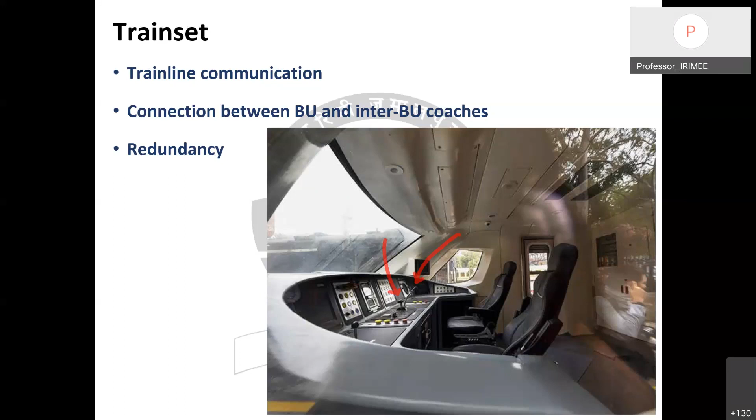I will try not to draw anything on the screen. Okay, at least I got that back. All right.

So there is one more thing, let me draw that. I think there is one more TFT, and it is only in front of the loco-pilot, not in front of co-pilot or assistant loco-pilot. You can also see one more handle, that is the auto brake, which is the last resort pneumatic brake, not supposed to be operated at all. Is it identifiable to you all?

Yes, sir. Yes, sir. Okay.

So there are a few things. We have seen a master controller which is at the center of the desk, a TFT touch screen which is in front of the loco-pilot, and there is one limp mode pneumatic brake at the end, which is basically in an isolated condition most of the time, all the time in fact. So we will forego the rest of the buttons, we will not get into that because those are hard buttons for operation of the train set. But the handles and the TFT screen are very important, and we will be discussing that further.

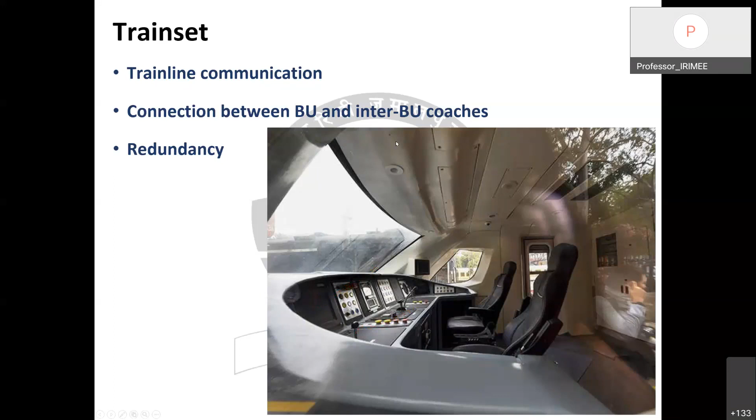Now there is another point. The coupling is very difficult - it's not easy to decouple a coach and change it. Has it been covered that if a train set becomes defective, not able to run, you need another train set as a replacement?

So most of you, is anybody from the loco side or are all from the C&W side? I need some feedback, few can reply.

Sir, I am from the loco side. Avinash Das, SSC GRC, Southeastern Railway. Garden Reach. Acha, Garden Reach. Yes sir, I thought GOC SR. Okay, but you are from the loco side - HHP loco or conventional electric loco? Sir, HHP loco. Then some of the things here will be much more familiar to you.

Exactly sir, but some of the things are a little new for people who are purely from the C&W side. But the people from the C&W side, you all know the concept of spare coaches.

Yes? Yes, I need some feedback at least. Yes sir. So what is the, okay.

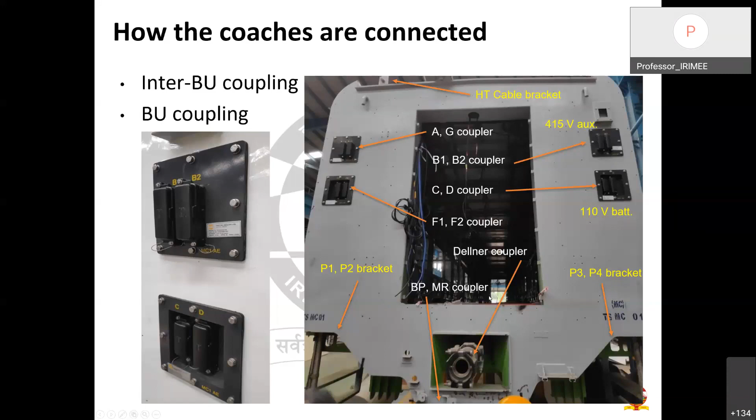How many traction motors are there in total? Anybody? Because propulsion circuit is already over. 32, sir. 32.

32 traction motors, right? And you would think some of the bogies are isolated. Now these are in pairs. One traction motor cannot be addressed separately, they are operated in pairs. So you can say there are 16 motor units, each unit has got two traction motors.

So that you can disconnect the whole bogie and isolate it if some of the motors fail or there is a problem. Any kind of problem, you can isolate the whole bogie, bogies after bogies. There are 16 bogies which are powered, right? In quite a good number of them you can isolate and your train will still run. Acceleration and deceleration may be slightly less if about a quarter of the bogies are disconnected, but still the train will run and reach its full speed potential. And there are other things like the compressor.

Bogies, or only 3 coaches? 16 bogies or 16 coaches? 16 bogies are powered. 16 coaches, 8 motor cars, 16 bogies are powered, right? Each bogie has got two motors, but these motors are not controlled separately.

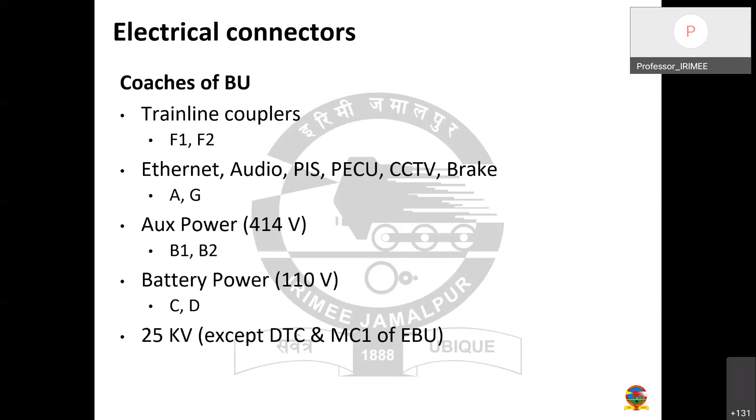Battery power, it is both are there because battery normal, battery direct, for that we have twin brackets, and of course 25 kV. So you can see with slight variation, the type of coupler is quite similar. Here the TC to motor car, only difference is you can see here it's a power cables P1, P2, P3, P4, right? Rest other all things are same.

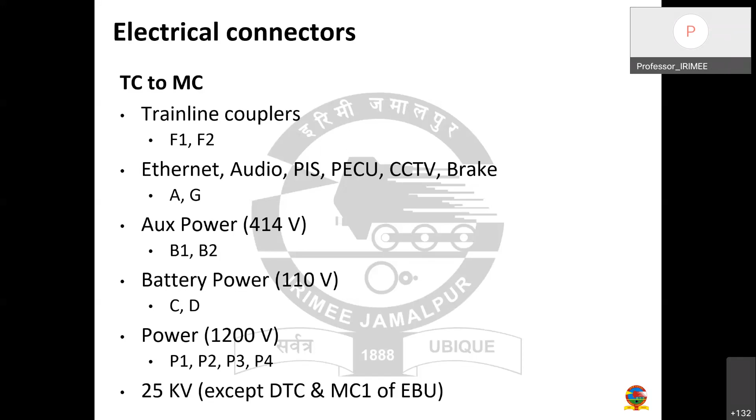It is trailing car to motor because trailing car has got a line transformer, and then of course that step down voltage has to be carried to motor car, motorized coaches. And then we have pneumatic connections also separately, that is brake pipe 5 kg and MR pipe 10.5 kg, that has the nominal pressure. MR can work for all the way from 8.5 to 10.5 kg.

10.5 is upper one, and then brake pipe of 5 kg. Why do we maintain brake pipe when we have EP brake, electro-pneumatic brake - why do we maintain brake pipe, train line brake pipe? Anybody? In case of during low speed, is required... control pneumatic braking. If train goes below 30 kmph it requires. No.

If you are using that, the train speed will be limited. Your normal control is only through EP brake, electro-pneumatic brake, through electronic signal application and release. If one channel fails, there is another channel, again electronic brake. If all the channels fail, then you can physically control by modulating the brake pipe pressure. That is happening right now. You reduce this pressure and brakes will be applied.

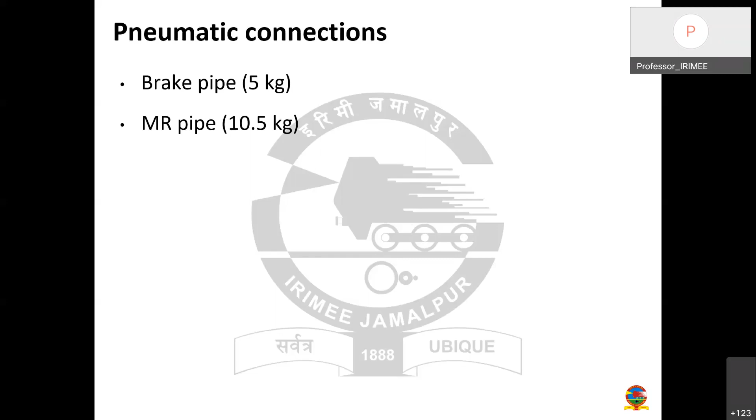So what are the things that come in TCMS? Train Control and Management System, right? This controls motoring, braking, direction, reverse, front, and so on, right? It runs in either side. Both sides are front actually, right? Only it is A direction, B direction, right? The control of door, right?

These coaches are fitted with sliding type automatic doors, which need to be closed completely for the train to even start.

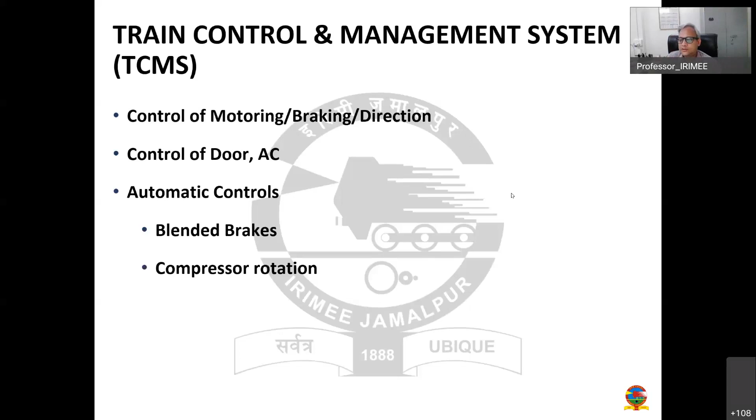The control desk, right? So these are just a few items on the LP side and ALP side. There are a lot of them, and for most of the part, like in case of door opening, what is the minimum condition required for a door to be opened? Anybody? What is the first requirement for the door to be opened? The brake should be fully applied. Actual speed should be 0. Speed should be 0, yes. Speed should be 0, right? The train should not be running.

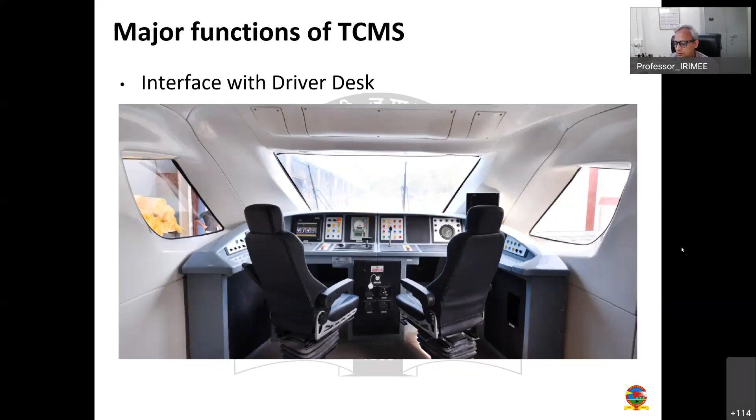Okay. I have to disconnect the annotation. Go to next slide. Okay, let me see that.

Right. Panto and VCB setting: of course, lowering we can do, raising we cannot. There is a separate button for that. In the panto setting, there is one pantograph in each basic unit, so there are 4 pantographs. Only 2 of them can be controlled together. Yes, no, anybody? Yes, sir, only two can. So what is the combination? Which panto can be operated? 1 and 4, 2 and 4, 2 and 3. Yeah, exactly. So this setting is available here.

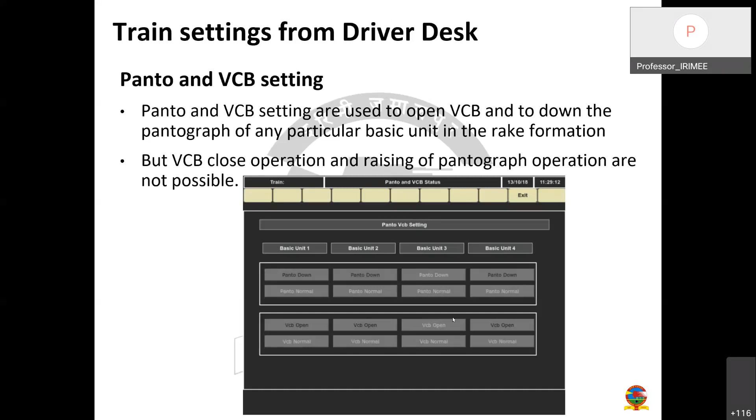Go to next. Bogie cutout. People from the loco side may know the motor cutout procedure. In Alco locomotives, there used to be one handle, the MC cutout handle we used to call it. In later generation software control, you could control it from your display. The same thing is available here. You can isolate any bogie from your DDU, the driver display unit. It is a touch screen.

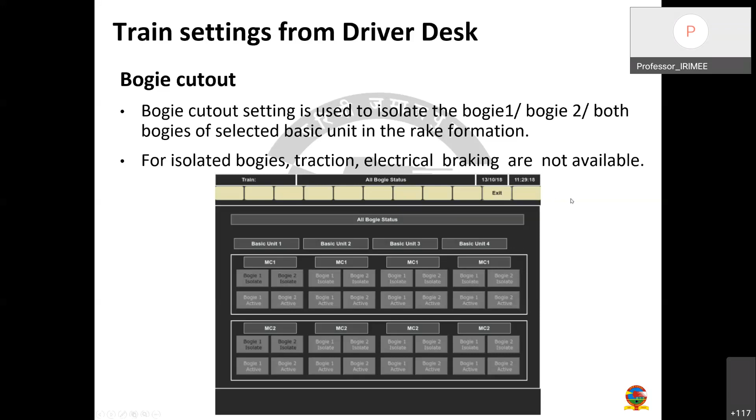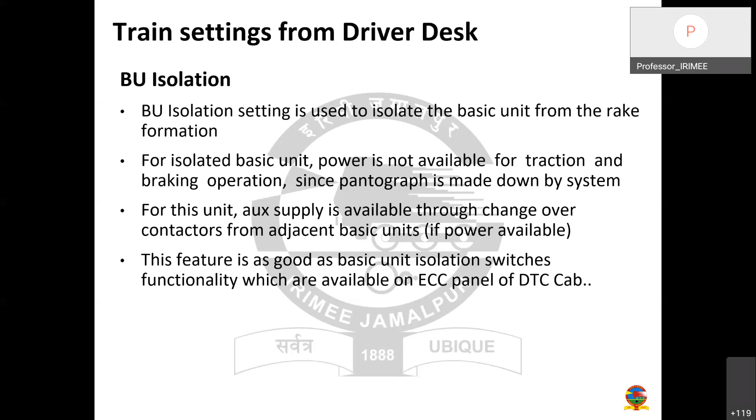Now basic unit isolation. Not only that, you can isolate the whole basic unit, right? If you isolate it, power is not available for traction, but power will be available for auxiliary in that basic unit, because due to some technical problem you might have isolated the basic unit, but there may be passengers. So all passenger comfort things will still be on, but everything related to motoring and traction would be isolated. So we have a system of BU isolation.

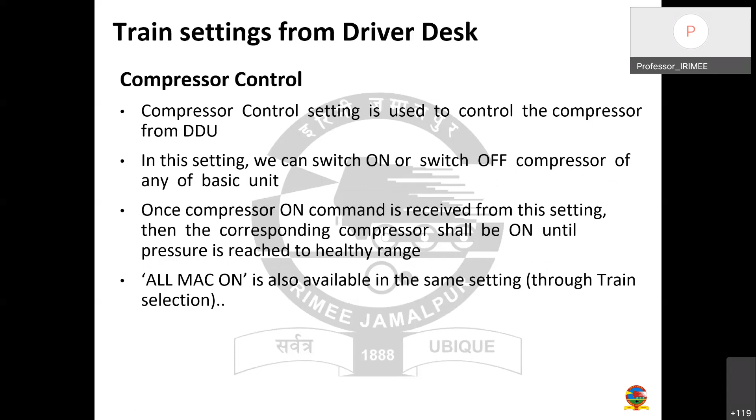Then it also maintains the compressor control. There are 4 compressors and you can control them individually. You can turn all on, switch off any specific one, or put it on auto, then the computer decides which compressor has run most so that it can be switched off. EP brake isolation can be done here. Bogie cutout cocks and physical isolation valves are available, but you can simply cut out from the display unit also, because every application and release is by the computer. So you can cut out the whole thing.

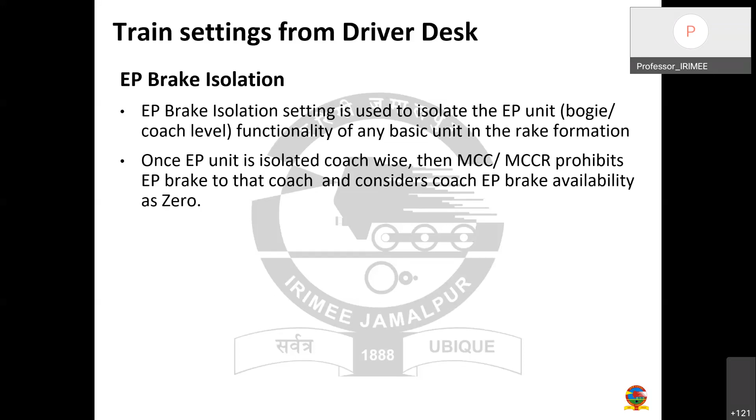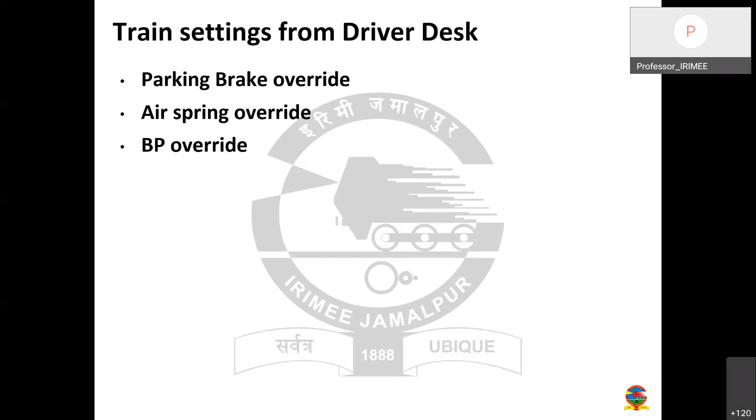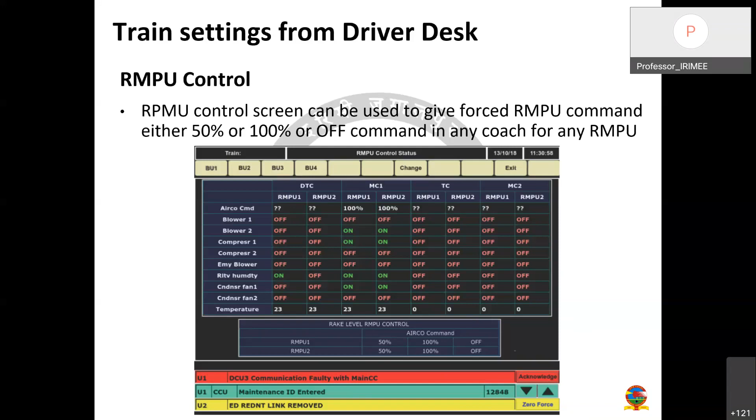Then there is AC control. I just told you that all the AC can be controlled right from the driver's desk. So load balancing, switching on and off, everything can be done from the driver's desk. Is it visible to you all? Because I am going through the last 3-4 slides. Visible, sir. Yeah, these are very basic functions of TCMS, because it's the backbone of the control system of the train.

So if there is a permanent problem with these doors, it can be overridden, and the system can bypass that and still start the train. Or on the other side, individual doors can be opened. Right now, the system opens all the doors on one side, either left side or right side. Why one side? Because the platform will be only at one side, isn't it? Platform will be either left side or right side.

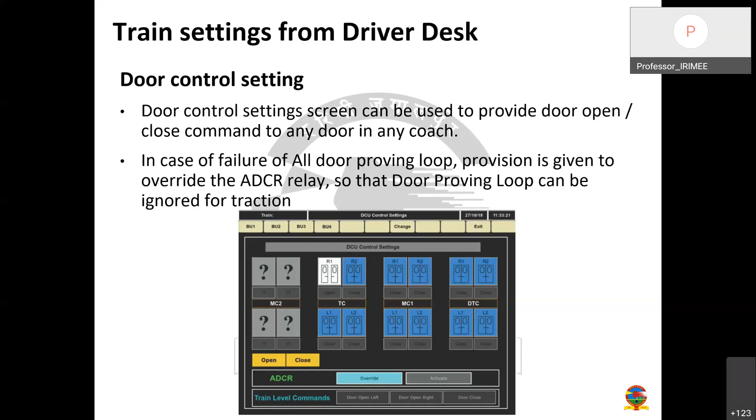So one side doors can be opened, and the system works by default by opening all the doors at one side, either side. So that default behavior can be overridden. One specific door can be opened or closed. That is also possible through the driver's control desk, right?

Then we have pantograph control, VCB control. There is a VCB before the pantograph and there is a VCB after the pantograph. I think it should have been covered in your propulsion circuit or power circuit, so I'll not go into that. There are dual VCBs on either side of the pantograph. That also can be controlled here.

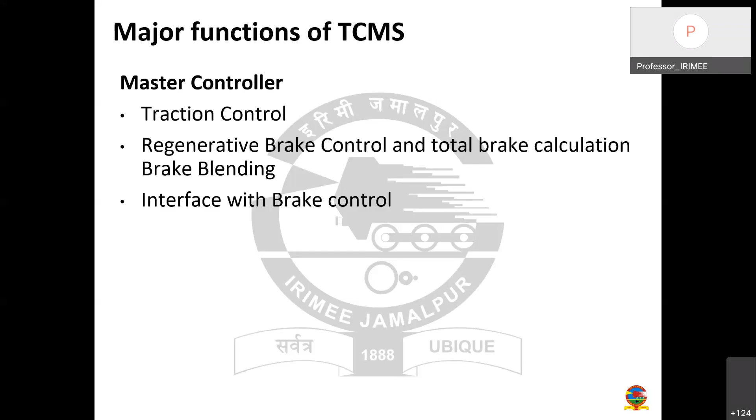Then the most important controller is the master controller. It does the traction control, regenerative braking, total brake calculation, blending of brake, right? And interfacing with the brake control. So there is electronic circuitry. It simply interfaces with that. Okay.

So it is interfacing with, I told you already, it can control the whole RMPU, but RMPU gives the feedback back to the TCMS. There are a few things. Say, for example, if a coach catches fire. So in case there is any fire in a coach, then how will the AC work? The blower will be reversed and the AC unit will be shut down.

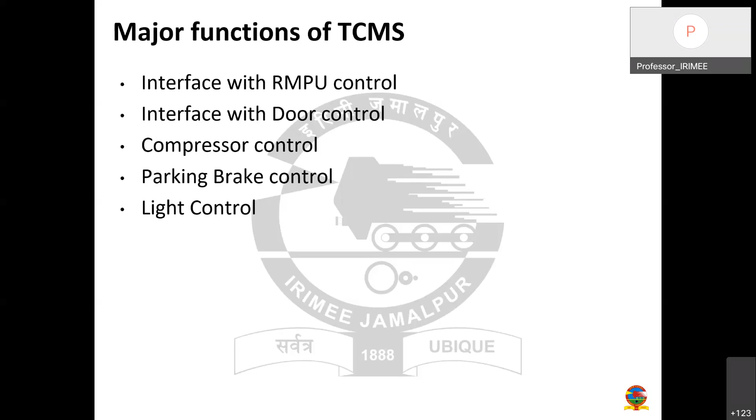But how does it give feedback to the TCMS? Through the same interface. So there is a lot more. It is not only control. There is a feedback part also, right? Okay. Now, what are the other things? Safety system.

So rollback is not permitted here. If rollback is detected, right? If the train is standing and it is, as per the key position, as per the occupied driving DTC position... There is an occupied DTC and there is an unoccupied DTC. Which one is the occupied DTC? Anybody? There are two DTCs.

Leading cab. Leading side is occupied. Leading cab, yeah. On the other side there will be the guard. Even that will be an occupied cab, but it will be occupied by the guard. So when you say the occupied DTC, that means there are the loco pilot and co-pilot, and the train is moving in that direction. The key is set in such a way for the train to move in that direction. It is the occupied cab.

So if the train starts rolling in the other direction, whatever the reason, something is pushing, or there is a gradient, anything. If the train rolls in the opposite direction to the key position, then the system automatically detects that and applies the brake. So even if you leave your train unattended, which of course loco pilots don't do, and a rollback condition happens, the system will stop that.

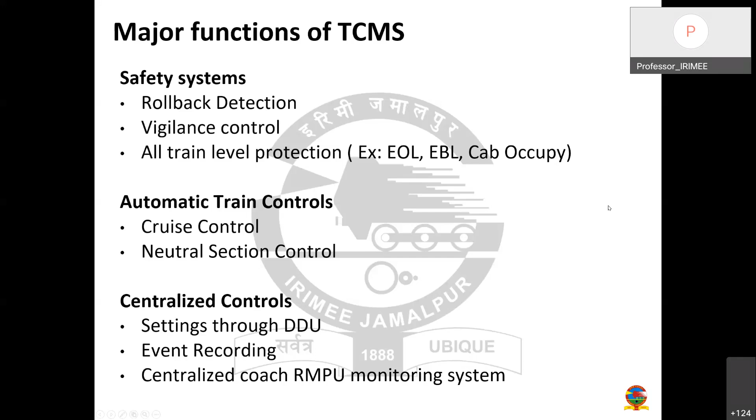Then apart from that, there is event recording, of course, data like we have in locomotive. All the technical parameters are recorded and kept for downloading. There is remote train monitoring also. So all the data is transmitted to a centralized server. So even though the train is running, a large amount of data is made available to the maintenance people. They can see how well the train is running. So it is very good in that way, very informative.

Now coming to the train line communication, right? Now this is end basic unit. How can you identify it is end basic unit and not a middle basic unit? Anybody? DTC is there. DTC is DTC. Otherwise, it will be NDTC, right? Now the components here, we can now look at the bottom. So there are a few things. Now the size of the block does not represent the size of the component. It is a block diagram. I'm repeating that. So the size of the box doesn't mean that it is a big component.

So ECN switch, that is Ethernet consist network switch. It is a simple Ethernet switch basically. These are industrial switches. Anybody who is working on the computer side would know what an Ethernet switch is. Ethernet switch, anybody? With Cat5 cable or Cat6 cable coming to your computer with RJ45 connector. Remember that?

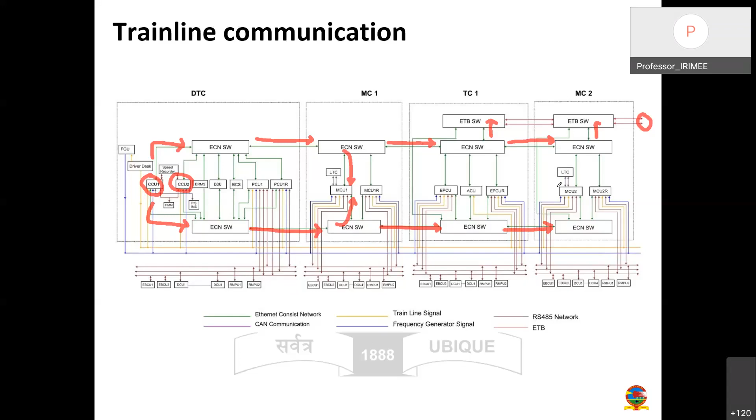No, it may not be that clear right now, but let us talk about coach to coach. It is just how the coaches are connected to each other I am trying to explain. Right? Now let's see the DTC. Now, the important thing here is driver's desk. Is this visible to everybody? Yes, sir. Yes, sir.

Now, as I already told you, the size of the block doesn't mean the component is that big. So these Ethernet switches are very, very small components. Of course, they are very, very rugged. It's not like your normal Ethernet switches. It is similar to military standard. So circular socket type connectors are available, not RJ45. So these Ethernet switches, they are two and wired separately and in parallel, right? We already discussed that. But what are the other things?

If all of this fails, the digital network, then the system goes into RDM, rescue drive mode, right? That is based on frequency. So rather than digital network, now your system will rely on a frequency generator. So based on frequency, by modulating the frequency, you can control everything. Now the driver doesn't have to bother.

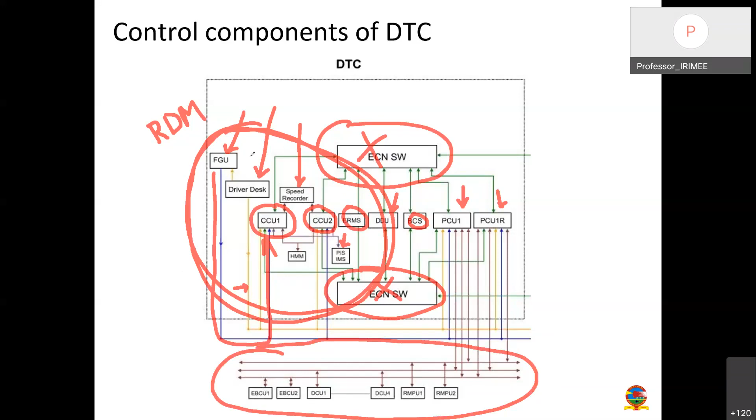Okay sir, so these things are special in the DTC - it will be in both DTCs. These things are common everywhere. At the bottom there is a network of 3 parallel cables - can you see? These are all dark maroon colored, not purple. Let me annotate again - there is one here, one here, and one here, right? There are 3 parallel cables.

You see, your brake control is connected to one. Your door control, DCU1 to DCU4, is written - is it visible? Can you read that? Yes sir. So DCU1, DCU2, DCU3, DCU4 - there have to be 4 actually, they simply write 1 and 4, so 2 and 3 are in between. So door control is at the middle, and then you have RMPU control 1 and 2 - you have two RMPUs, door control one for each door, RMPU control one for each.

But your brake system again has redundancy - EBCU1 and EBCU2, that is electronic brake control unit 1 and 2, they are parallel. So even the brake control units are double. One fails, the second will keep working. Your driver will not even know the difference, but maintenance people will know.

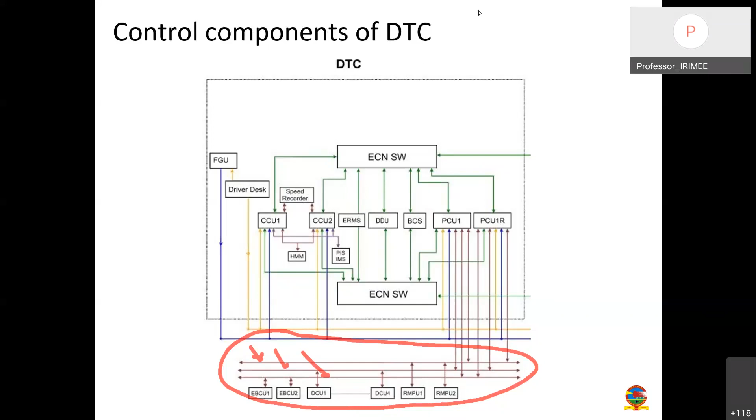Exactly the same thing, the rest of the thing will change. So major component, we discussed that already so I will not go much into that. Driver's desk - we have shown what are the major components in that. I'm not going into each button, that is also available, if I start listing it will take too long so we will just leave it at that.

So major control on driver's desk is basically speed, driver display unit which acts like a centralized control, and the master controller. So digital signal goes through the 2 ECN switches - this is through A and G coupler. Whatever we were looking at, ECN switch, that is through A and G couplers. We discussed the coupler, if you remember - remember that A and G coupler?

Initially, how many couplers are there? I just showed that it is available - we will share this whole material. Yes sir, 8 couplers. All right, and then train line signal through F1 and F2 coupler, and the frequency signal - again the frequency signal is along with the train line, couplers are the same, okay.

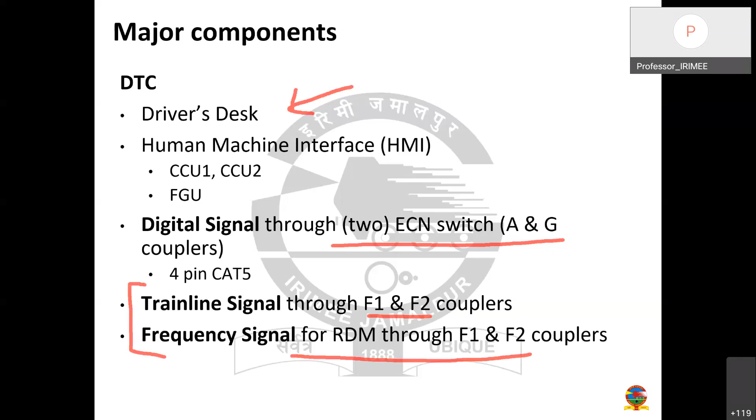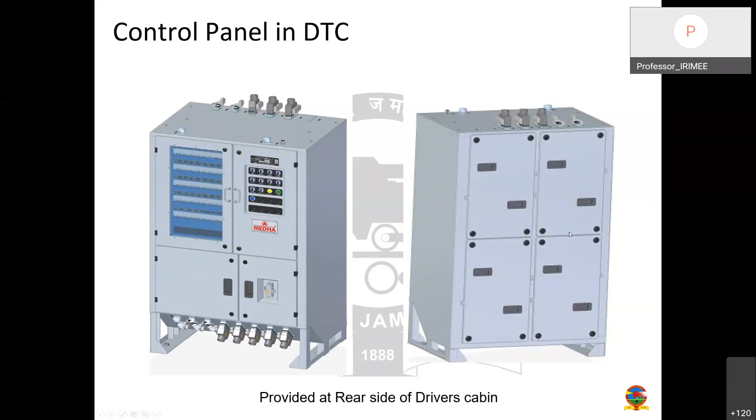So this is how the control is connected - this is the control panel in DTC. It is behind the driver, where the driver sits, the driver's chair - you have seen that rear side, we have not shown it. It is mounted onto the wall itself, flushed with the wall. So it is behind the loco pilots, the front and rear. So this is the inside view.

So these are basically - what happened? Sorry, yeah. So these are additional items for the Loco Pilot - these are basically the centralized control units, the computers, networking switches, headlight controller, train protection, and so on. This is the rear of that, so this is a cabinet for connecting all the cables. All cables are connected from outside through the circular socket type connector, so it is very easy to disconnect and reconnect again - the whole thing is a very, very modular design.

Okay, now we go back to all other coaches. So what are the common things available in all the coaches? I already told you, brake control unit is redundant - 2 of them are there, it is through the network, so this brake network is available. Then door control unit, and then RMPU, that is the AC control unit - these are 3 individual networks, available in all the coaches. It uses RS 485 / 485A standard.

So these are connected through ECN switch. Right, okay. So it is common.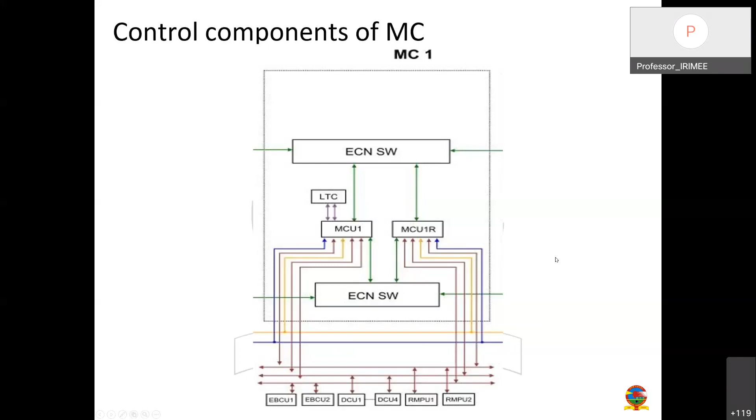The other things are all the same. Only thing is LTC. Okay, this is how it looks like.

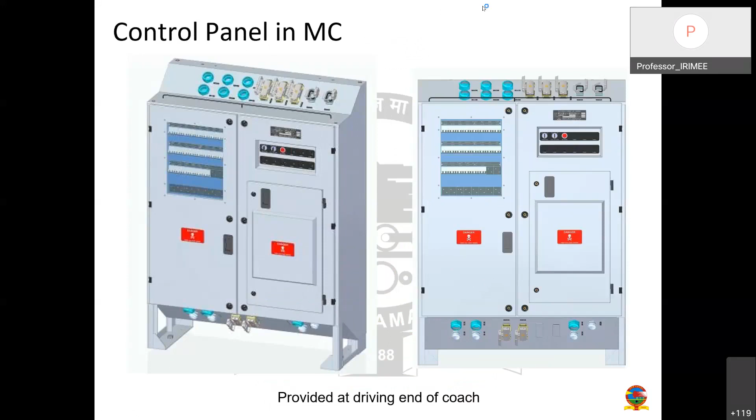Control panel in motoring coach or motor car. Again, something else is different here, that is the driving end of coach. What is the driving end of the coach? Anybody?

Driving end of the coach, which side DTC or NDTC is in a basic unit. So these coaches are directional, right? Their coupling is directional, their orientation is directional. So this is provided at that end for any basic unit—one side is NDTC or DTC.

So these are provided at that end of the coach, right? All the control panels, whether it is trailing coach or motor coach 1, motor coach 2, they are all located towards the DTC or NDTC coach, wherever it is marshaled.

Right? And what are the things available here? Now, you see there are some CCTV controls, the passenger information system, right? Now there is, of course, MCU there—so it's a control panel in MC. The computers, basically that is MCU and MCUR.

Modular circular socket type connectors for keeping it. Okay, now this is the TC. Again, in that there is one more switch, there is one additional switch here. You might notice it here—that is basically the Ethernet train backbone switch.

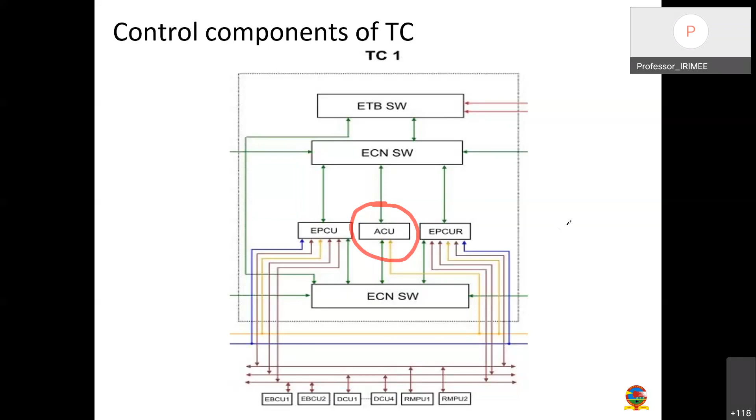But apart from that, rest of the things are quite similar. There is no motor control in that, there is no LTC control in that, right? So of course the same thing is described here—powering the auxiliary converter unit to power the auxiliaries is available here, where the control is concerned.

Okay, so now let's see how it is. So this is the panel, again it is at the driving end of the coach. So it is at the driving end of the coach.

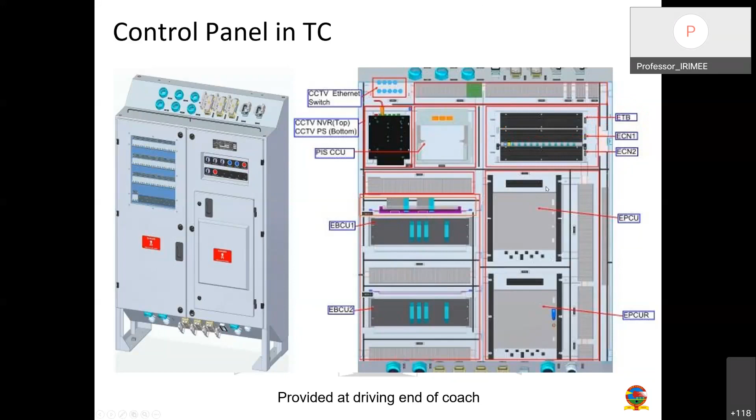And again, its CCTV camera is there, passenger information system is there, right? EBCU is there, and then its computer, EPCU, redundant computer, Ethernet backbone. This is one extra item which I have already told you. This is the physical location of that particular item, right? Okay. And then ECN1, ECN2, like any other coach. So you can see with slight variation, even these control cabinets are also quite similar in their dimension and other things. Some components only change inside that.

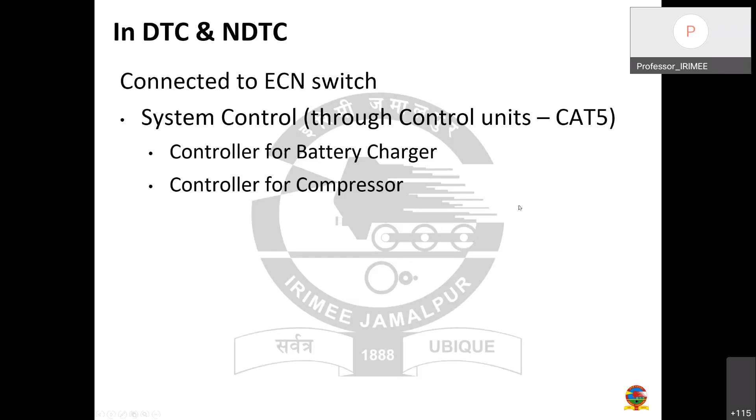So in DTC and NDTC, there are some of the things which are common in these both. That is one battery charger, right? BCS, then controller for compressor. These two things are specific to DTC and NDTC because battery bank and compressors are provided in DTC and NDTC. Isn't it? Remember that. So now this is for middle basic unit. It is absolutely same. Only thing special here is rather than DTC, it is NDTC.

Now, in case of NDTC, you have BCS, you have battery charging system, but you don't have DDU, you don't have speedometer, don't have FGU, you don't have master controller. All those things which are related to the loco pilot are not available here, right? But one more thing, if you detach the end basic unit, now my question is to you all. If you detach the end basic unit, can you drive it?

It is self-contained. You want to do some shunting work, you detached the end basic unit. End basic unit means there is a DTC in that. Loco pilot can sit there. Can you drive it? Anybody? All computers are there, all MCs are there, motors are there. It's a basic unit, all 4 coaches. Can you drive it? No, sir. Communication will not close. Feedback.

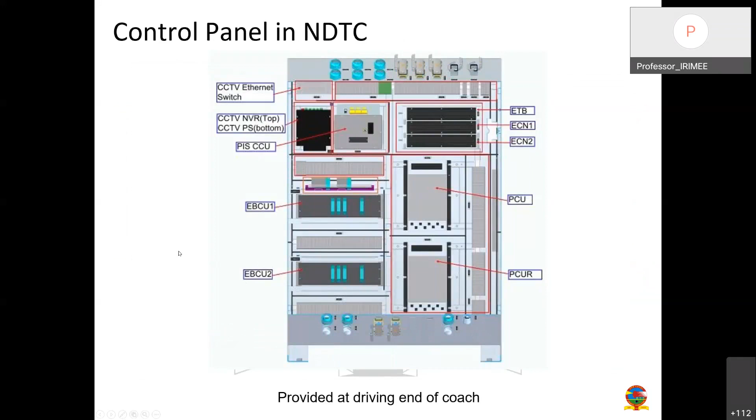So this is in NDTC, the control panel. These are the parts of the control panel inside the NDTC, right? So we will not go much, because these are similar to what we have seen so far. So this is about it. We started 10 minutes late, and we have ended roughly 10 minutes late. So, questions, please.

There is a lot of computer networking or computer type networking that is going into that. It is only because the majority of the things, or the control system, is digital now, right? So there is a CAN bus. The CAN bus we will discuss, because Knorr-Bremse uses the controller area networking, right? They use Cat5, so it will be TCP framing, and then RS485. So there is a lot of computer-based networking available in that, which controls the whole train.

And these are the standards which are followed the world over. It is not something new that has been invented here. The basic standards and concepts are available in train sets of the latest design the world over. The same thing is being used here.

Yes, question please. Sir, right now 2 rakes of Train 18 are available, sir? Are the upcoming rakes Train 18 or train set? Train set. No more Train 18. There is a lot of modification, like traction motor cooling has been modified, that kind of thing. Like the marshalling order, how NDTC and motor coaches are marshalled, that also has been changed. It is a permanent change.